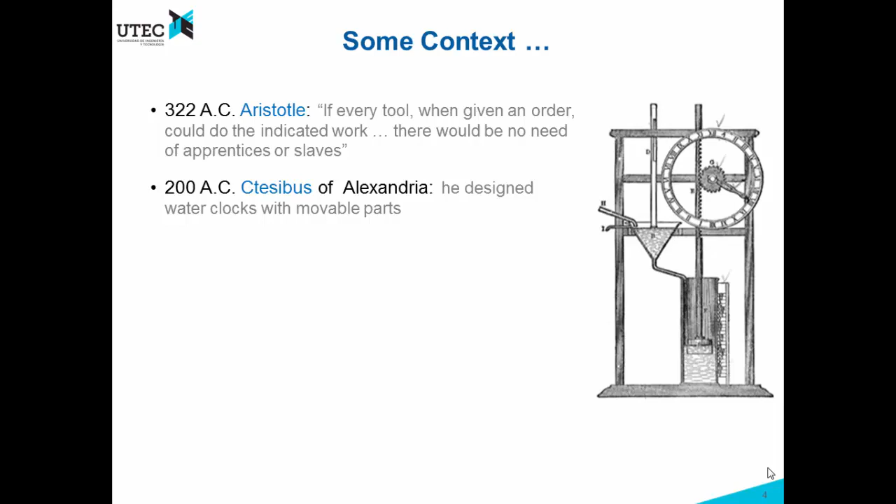More concretely, Aristotle said, if every tool, when given an order, could do the indicated work, there would be no need of apprentices or slaves. Also, Ctesibius of Alexandria designed water clocks with movable parts, which resemble a mechanism not too similar to a robot, but it's still a mechanism.

In 1738, Jacques de Vaucanson built a mechanic duck and a flute player. It had a movable anatomy. Up to here, there are only mechanisms or automats.

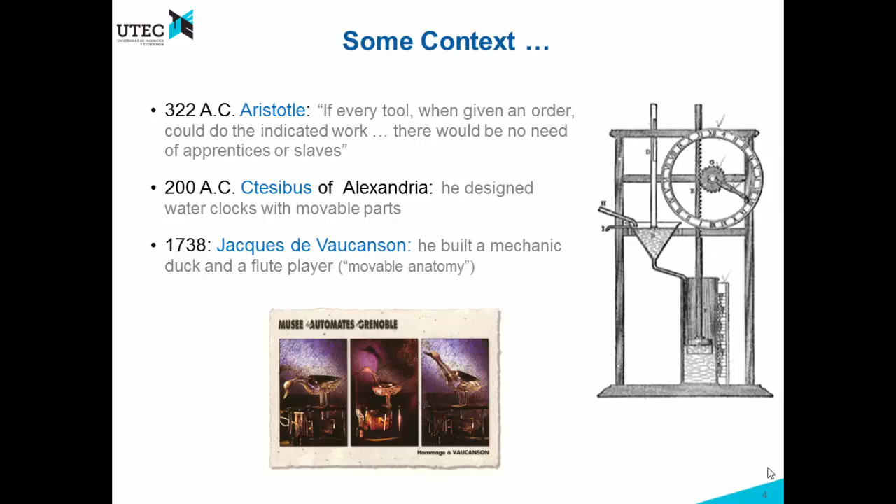The word robotics was first used by Isaac Asimov. He was a writer of science fiction, and he used the word robotics. Some of his books are I, Robot, Robots and Empire, and many others. He also wrote the so-called robotics laws, which only exist in science fiction.

The first law says that a robot may not injure a human being, or through inaction allow a human being to come to harm. The second law says that a robot must obey orders given by humans, except where such orders would conflict with the first law. And the third law says that a robot must protect its own existence, as long as such protection does not conflict with the first or second law. Again, these laws only exist right now in science fiction.

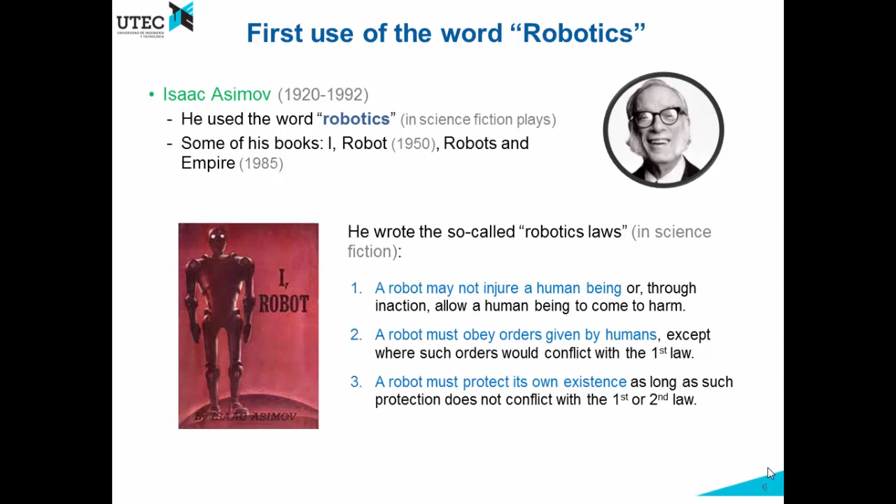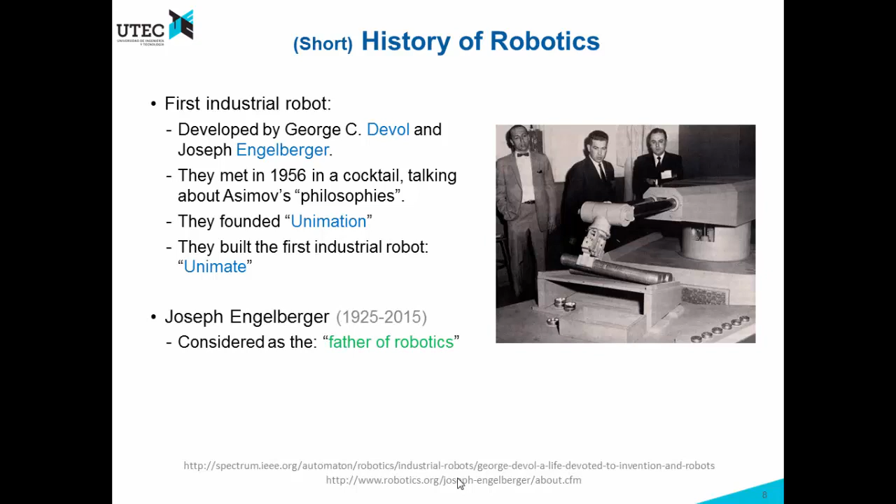The first industrial robot was developed by George Devol and Joseph Engelberger. They met in 1956 at a cocktail party talking about Asimov's philosophies and ideas of robots, robotics, and so forth. They founded Unimation, and Unimation was the company that built the first industrial robot, called Unimate, which is the robot you can see in the picture. Joseph Engelberger is considered the father of robotics.

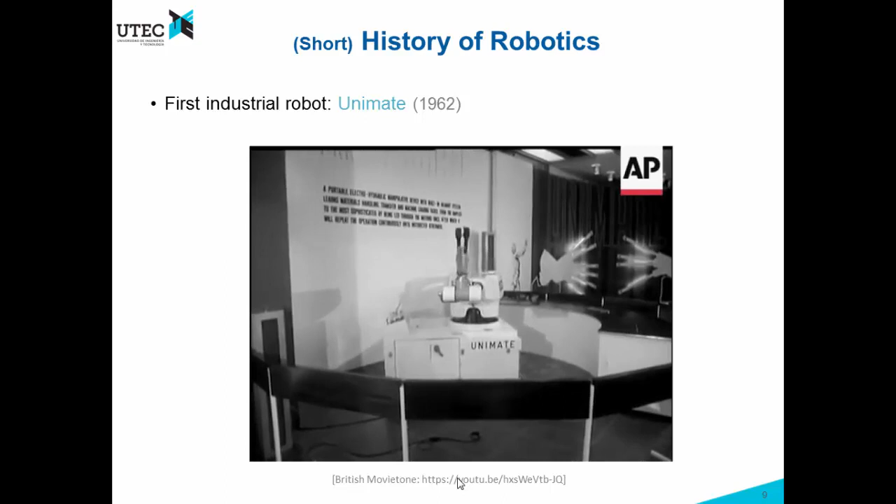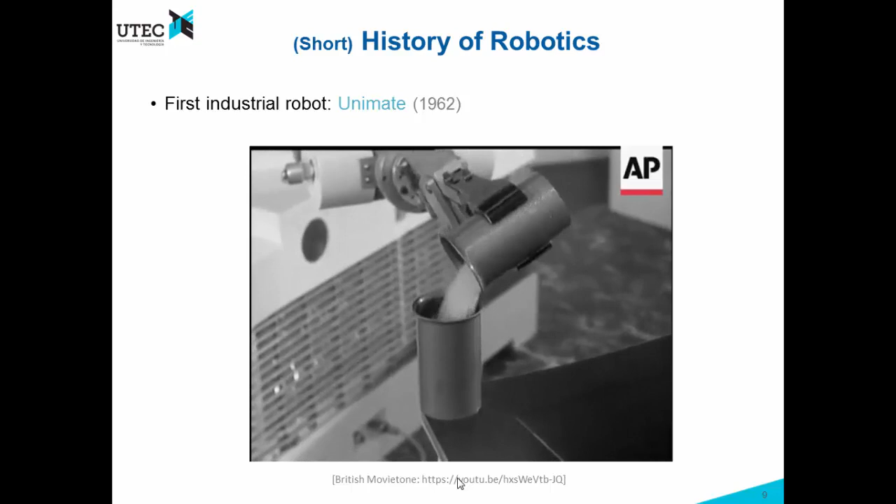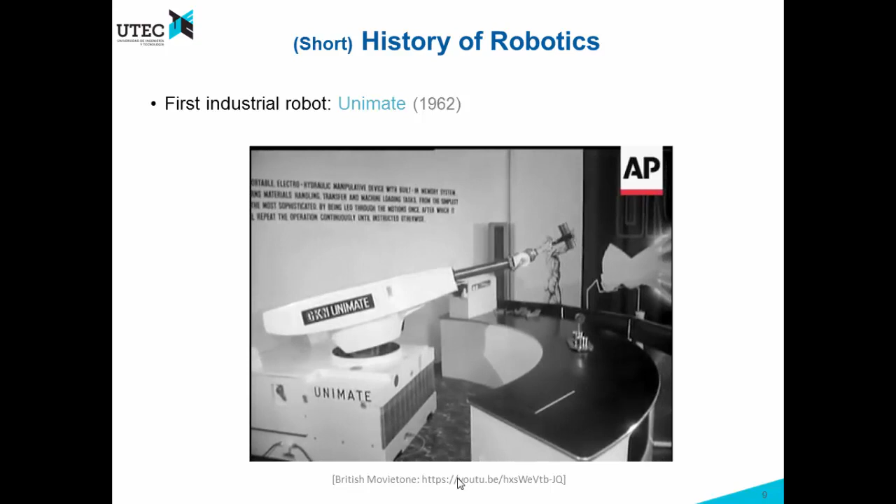Here is a video of Unimate, the first industrial robot and the first robot ever. You see that this is a manipulator; in fact, it has 6 degrees of freedom. It has a wrist, and it can move the wrist. It is able to grasp things, very little things, but it mainly works in open loop. There's no real feedback here, so if something changes in the environment, the robot will not be able to grasp the thing. You can take a look at the full videos at the link shown below.

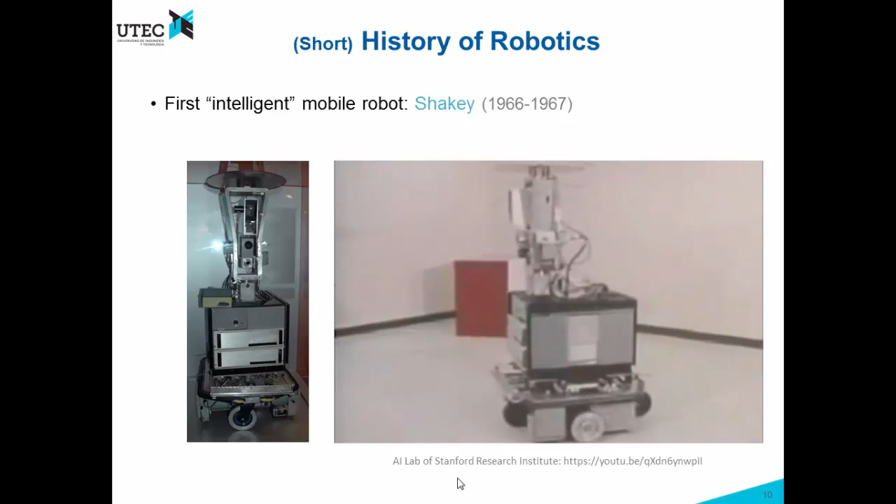The first intelligent mobile robot is Shakey, which was developed at Stanford. This robot is mobile, it has wheels, and it has some sensors, such as a camera, which allow it to perceive the environment and act according to the perception of the environment.

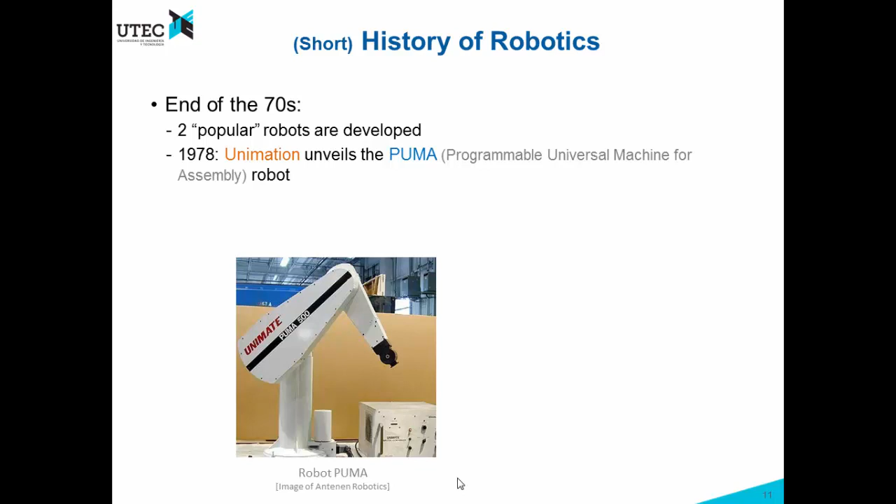By the end of the 70s, there were 2 popular robots that were developed. First, the Puma, which is a robot that you can see in the picture, and it has 6 degrees of freedom and has been one of the standards in robotics for many years. Then there is the SCARA robot, which stands for Selective Compliant Articulated Robot Arm.

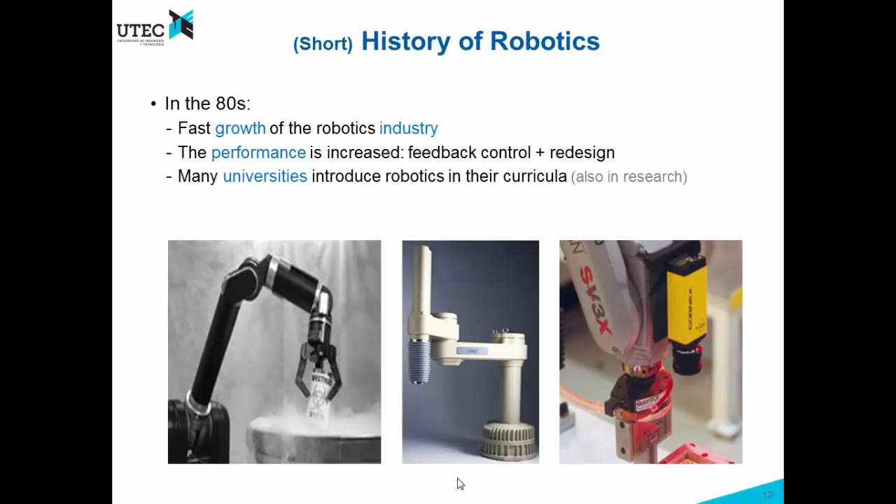In the 80s, there was a fast growth of the robotics industry. The performance is further increased. There is feedback control and redesign of all the structure. Many universities also introduced robotics into their courses.

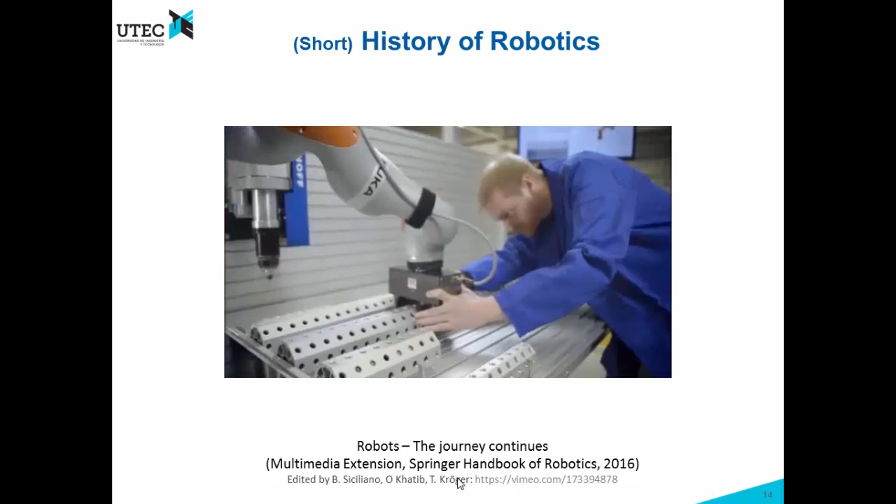There is also a new video which was part of the Springer Handbook of Robotics in 2016, an extension of the previous video. You can also take a look at this video to see very interesting newer applications that are now used. But what will happen next? Well, nobody knows, but Bill Gates predicts that there will be a robot in every home.